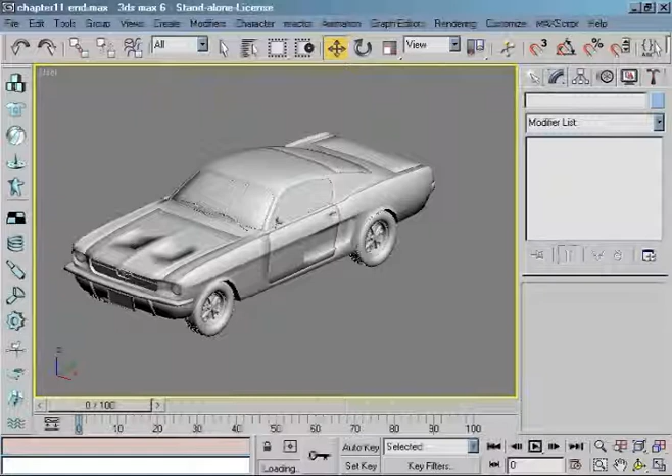Our car is now finished from the outside, but we need to create some of the interior. The rule is always simple. If you want to create a very realistic and detailed interior, you will have to spend a few days on modeling. But I'm going to show you a faster way. Of course, this will be a simple interior, but it is perfect for fast visualizations. Okay, let's go ahead and start.

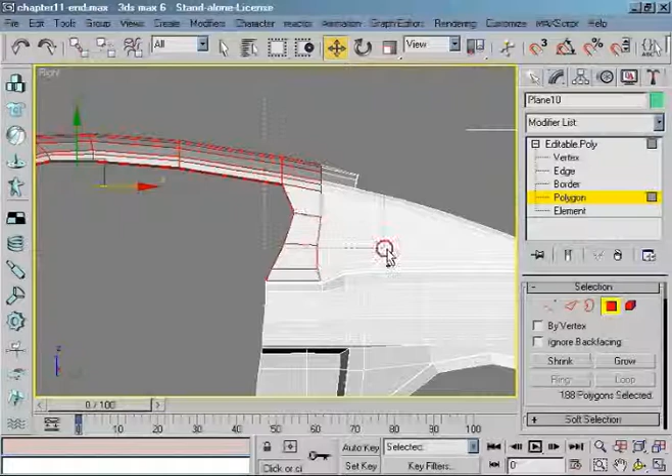I will use the upper side of the car body for making it, so I can go ahead and hide all the other elements. Now, I have to select all the polygons that will be used for our interior. And we're going to do polygon selection. Next, I will detach them. After this, I will only need to extrude it to add thickness. And after doing this, I will have the shape of our interior that will fit perfectly to the car body.

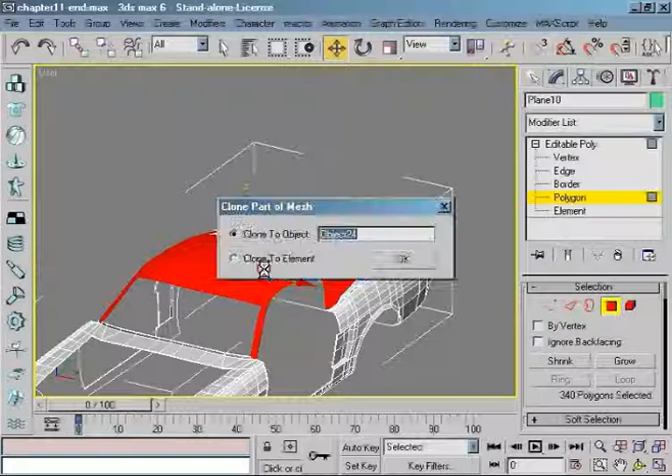Okay, almost all. Only a few polygons on the back. Okay, now I've got it. Now I will clone these selected polygons, of course, to a new object. Now I have got the base for our interior that I need to edit.

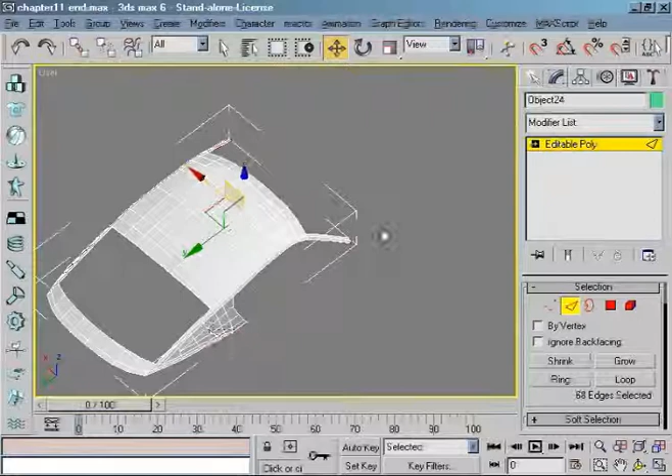First, I need to delete those edges, because with them, I will not be able to make the extrusion operation correctly. To make the selection faster, I use the border tool, so now I need to unselect some edges. Okay, and a few more on the front. Okay, that's all. So I delete them, and as you can see, I've got to repeat this again, because I've got another line of edges that has to be deleted.

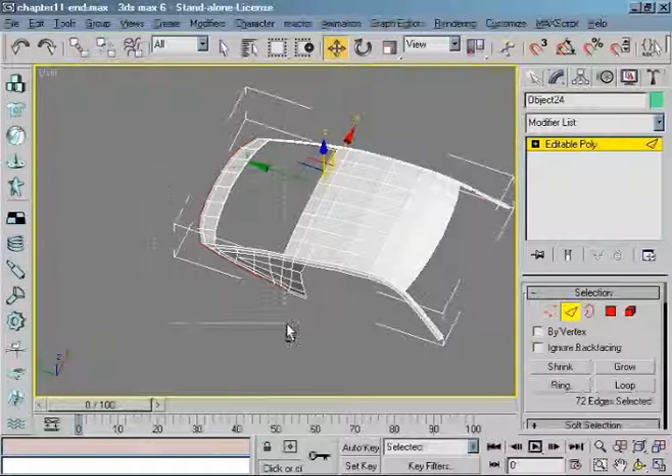I'm unselecting some edges because I want to delete only the polygons that were creating the thickness of the car body. Oops, that's almost all. Excellent. Now, I can go back to the polygon selection and invert all polygons. Of course, I will use the flip tool to make it.

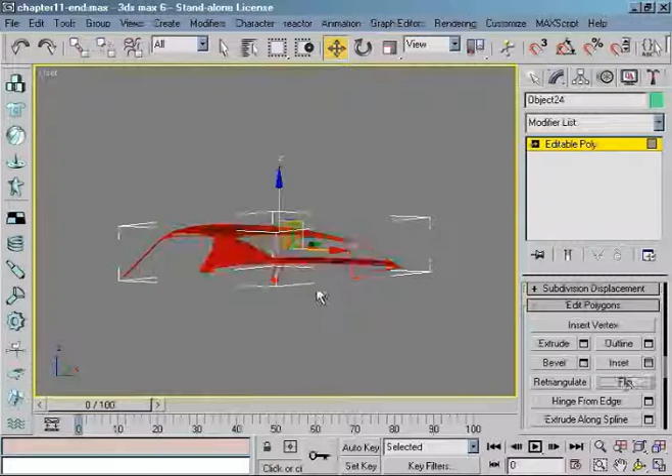Great. Now we've got a simple interior in our car, but let's work on it a little. Before extruding, I have to weld some vertexes. As you remember, we chamfered the corners of the side and front windows, so now I have to move it back to eliminate the bugs when I will be extruding. Of course, after extruding, I will have to chamfer those corners again.

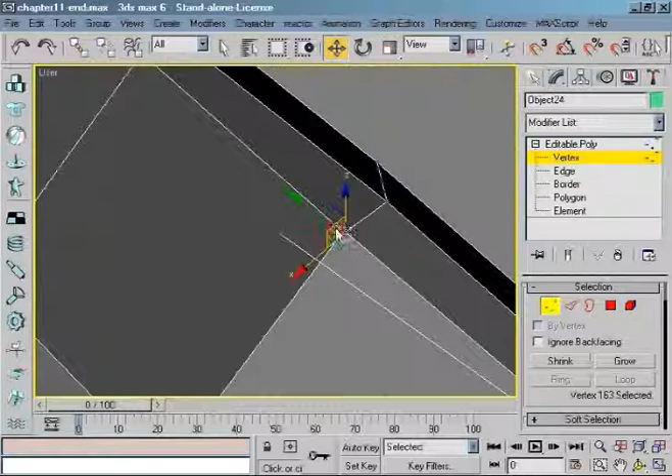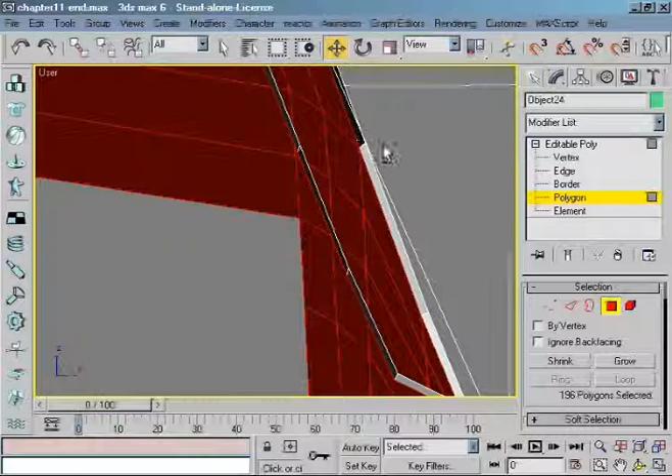Okay, now I need to extrude my interior to add thickness to it. The extrusion type I have to change to local normal and decrease the value of height. Next, I will delete the newly created polygons and it will lower the roof, and I will be perfectly sure that the interior will not be protruding through the car body. Now I can do the final extrusion.

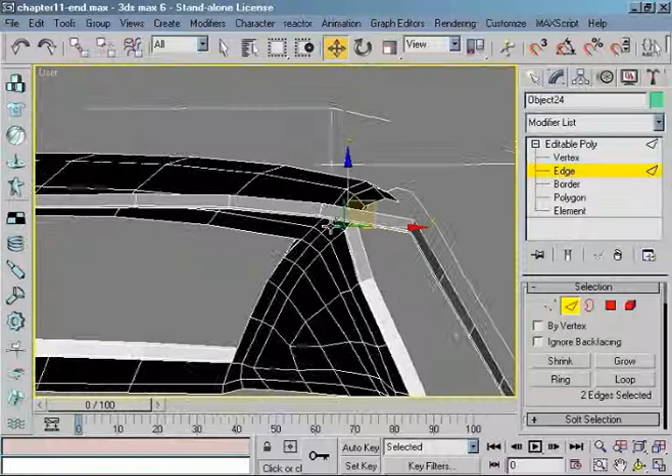Okay, I think that's going to be enough. I extruded the polygons one more time, but only a little. Okay, we cannot forget about the corners, remember? I have to chamfer them again because my interior will not be fitting the car body. And the other side. Okay, now I use the chamfer tool.

Now I can go ahead and add NURMS subdivision with an iteration set to 2. The upper part of our interior is ready. You can now add a rear mirror and seat belts to make it more realistic if you want.